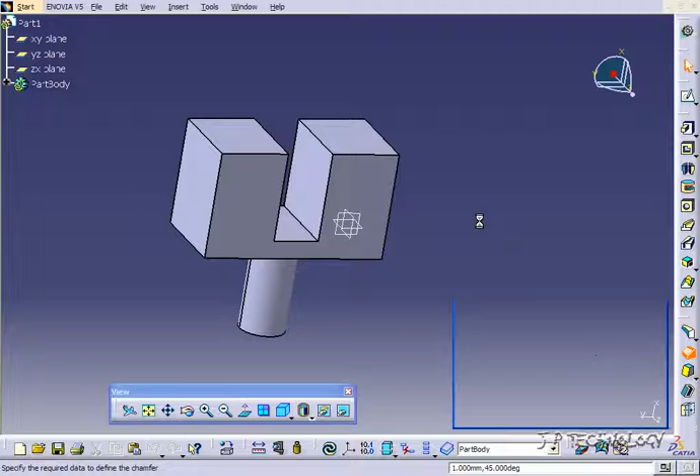So let's start doing some. Let's click the chamfer tool, and you're able to flip through some of the modes. So you can have a length and angle, or you can have a length and length. These are just two different ways that you're able to position and determine what your chamfer will be and what it will look like. For the first one, let's just do a length and angle.

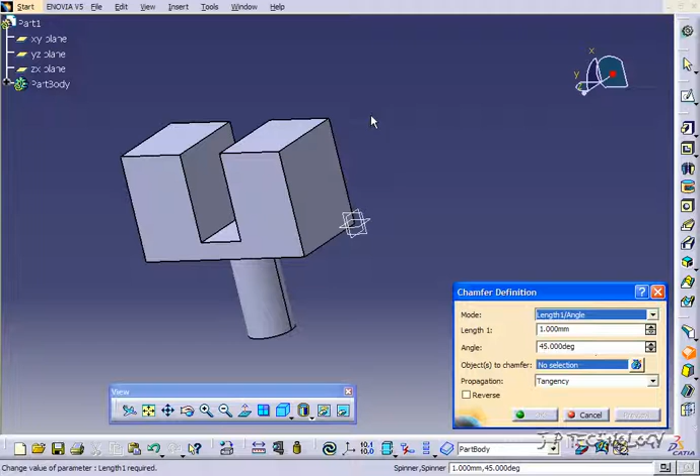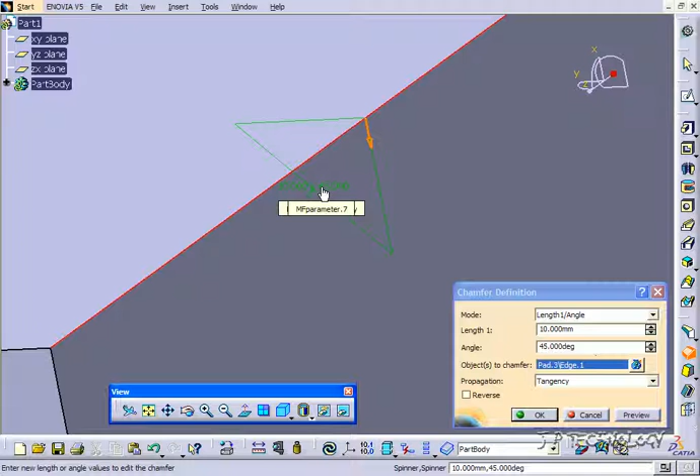So let's do it to this edge here. We'll click this edge here. And you can see right now what we have is a 1 millimeter length at a 45-degree angle. Now let's change this to 10. Click preview. So we can see that green triangle is going to be what our chamfer is going to look like. So right now it's at 10 by 45. Let's click OK.

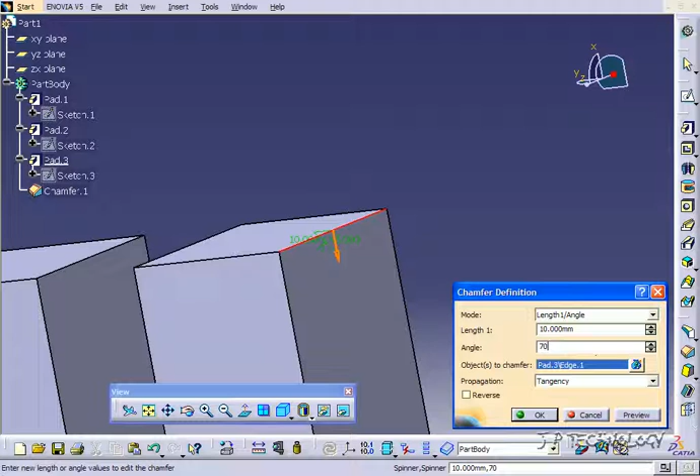And now we've cut out the chamfer there. Now let's open the part body, and you can find the chamfer in the part body there. If you double click on it, you're able to adjust some of it. So let's change the angle to 70 degrees. Click OK. And now it's swept back there 70 degrees.

Click it again. Let's do it 20 degrees. Click OK. And now it's swept down 20 degrees. So you're able to play around with these dimensions even after you've already made your part.

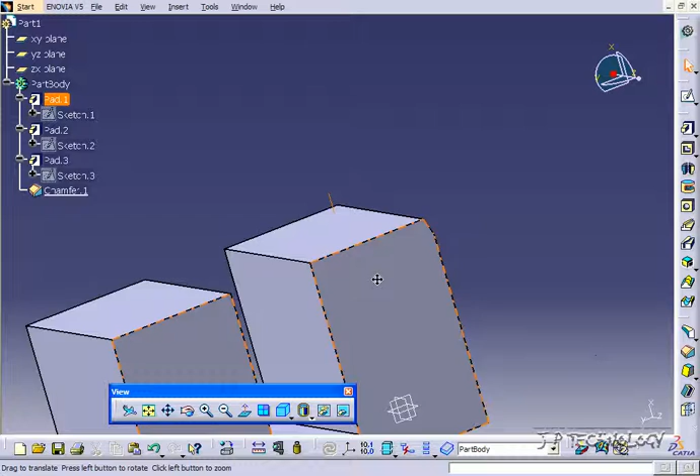Now on the outer edges such as this, you're going to be taking away material. And if we do an inner edge here, we're going to be adding material. So let's click the chamfer, and let's click the inner edge here. We'll make it 45. Click OK, and you can see that we've added material there.

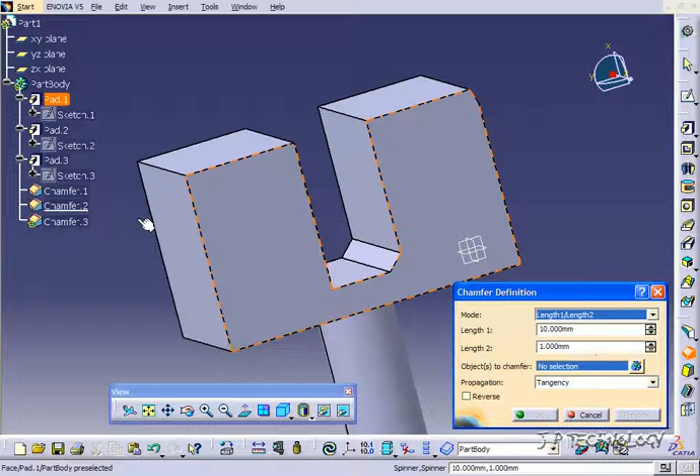Now let's try and do one that's the distance. So let's click chamfer. We'll do the length, length, and what you're going to get is you're going to get two lengths. So if I click this line here, and if you zoom in, you can see that for my length 1, it's 10. For my length 2, it's 1. And it's just going to create it.

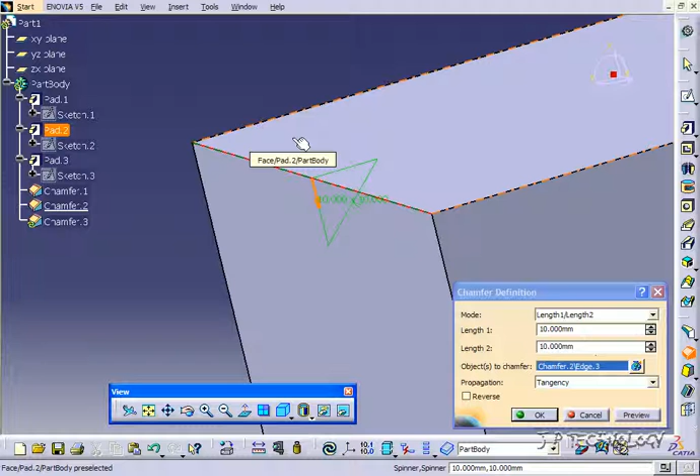So if I did a 10 by 10, click preview, really that's the same as having a 10 millimeter chamfer with a 45-degree angle. So it's just a different way that you're able to parameterize your chamfer definition. And let's click OK. And you can see that it cut out a 10 by 10, and it's also like a 10 by 45.

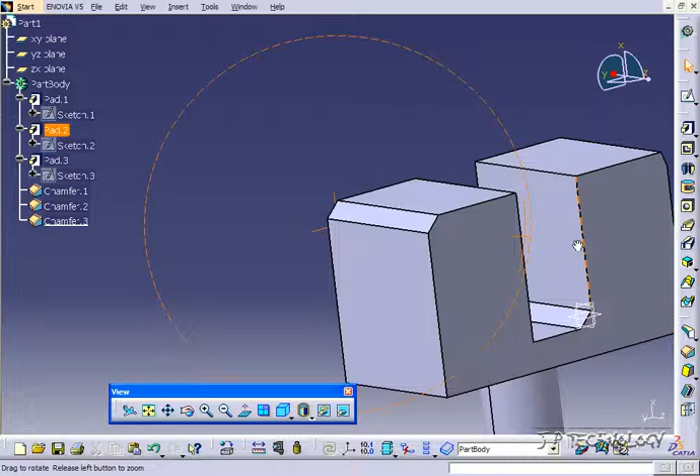Now you're able to do more than one edge at a time. So let's select a few multiple edges. Let's click the chamfer tool, and let's click this edge, this edge, this edge, and this edge. And let's make it 10 by 10. Click preview, and it'll give you a preview of what it's going to look like. Click OK, and we've chamfered it off with a 10 by 10.

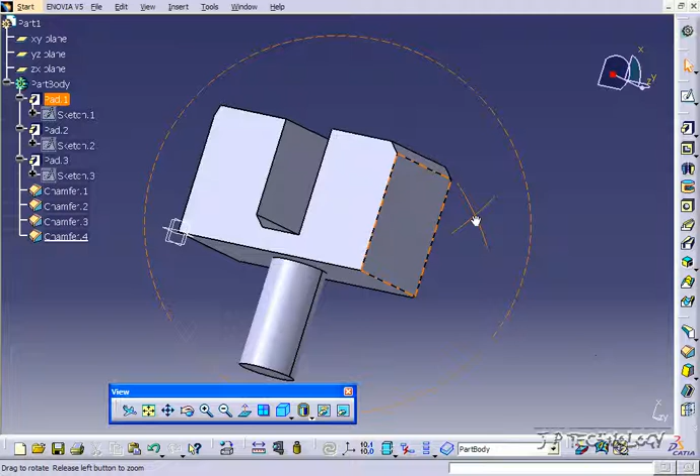Now you're also able to choose an entire face. So let's choose this entire face here. We'll click the chamfer tool, click this face here, and we're going to do 10 and 10 all around. Click OK, and it's done at 10 and 10 all around. Now again, clicking on a face saves you some time, as all you have to do is click once on the face rather than clicking 4 separate edges going all the way around the face.

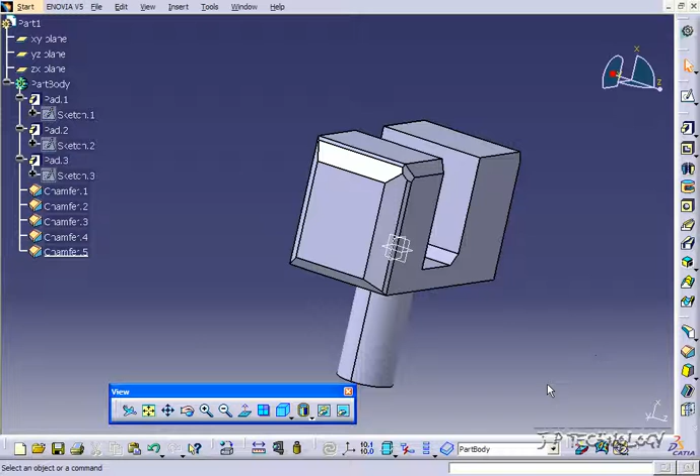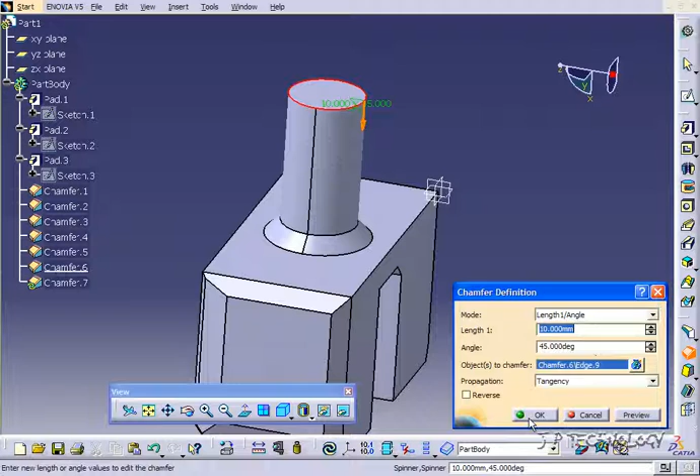Now let's do one that's around the circle here at the base. So let's click the chamfer tool, click the length angle, and we'll click the circle down there, make it 10 and 45, click OK, and it's created material, and added a chamfer to the bottom. Now let's do the same to the top here. Let's click chamfer, click the circle, click OK, and again we've added another chamfer to the top there.

So the chamfer tool works pretty much exactly the same as the edge fillet. You're selecting a single edge, multiple edges, or a face to create a fillet or a chamfer. And with the chamfer, you have the option of using a length and angle or 2 lengths to create your chamfer.

And that concludes our tutorial on how to use the chamfer feature within Catia V5.